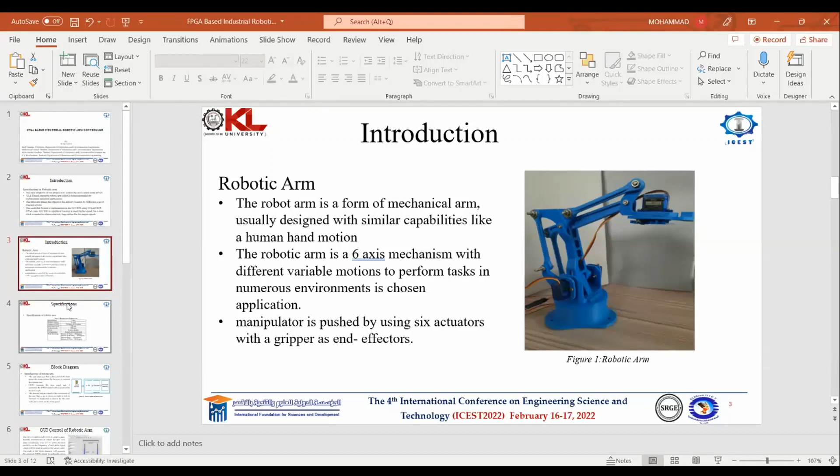As I said, the robotic arm has 6 axes. At every joint we have provided flexibility up to 180 degrees, so that in industrial places, if we change the workspace, it can be adjusted to that environment.

The cRIO processes the data received from the user and generates the PWM signal according to the angle selected by the user. The PWM signal is given to the servo motor, and after the servo motor receives the PWM signal, the movement of the robotic arm starts, just as the user desires.

This is the GUI of our robotic arm. We have 4 indicators here: time period 1, 2, 3, 4, which are used to define the time period of the PWM signal. We used 20 milliseconds since the servo motor actuator takes a PWM frequency of 50 hertz, so we need a time period of 20 milliseconds to generate the PWM signal.

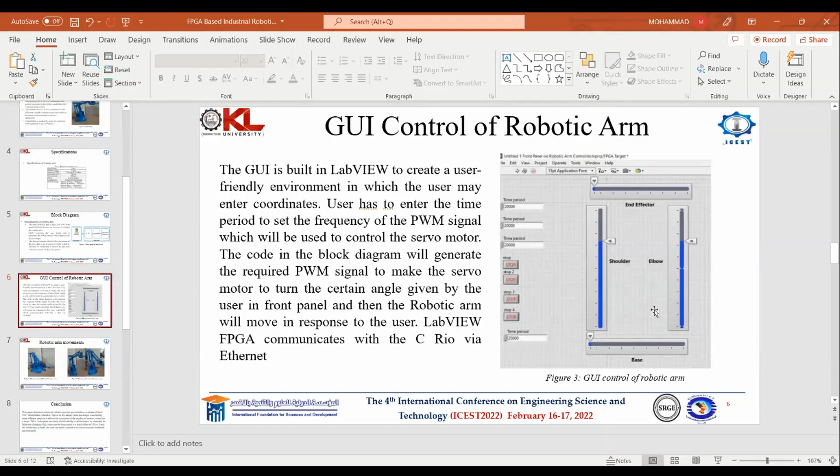There are 4 controllers we are providing. The bottom one is for the base, to control the whole body rotation, and two vertical sliders are for shoulder and elbow, to make x-axis and y-axis movement. The top one is the end effector controller, used when the robotic arm reaches the object, to either hold or release it.

These are some movements of our robotic arm. Figure 4 shows the movement of the end effector, closing and opening it. Figure 5 shows the movement of the shoulder, which is the y-axis, making the object move up and down.

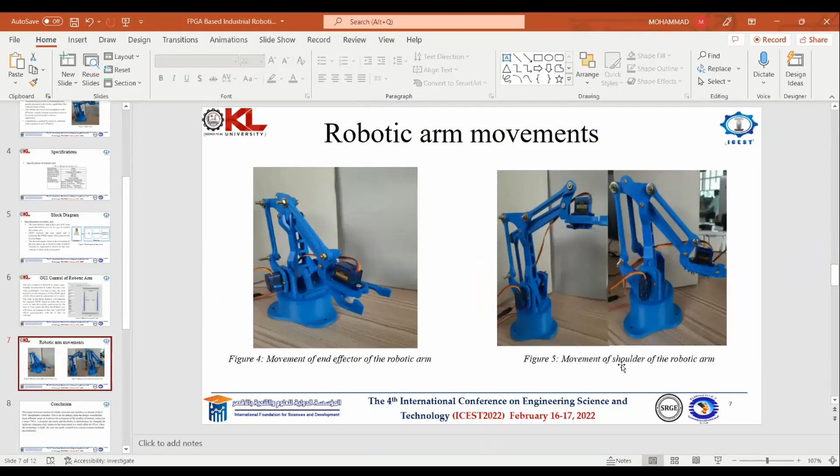In conclusion, we have discussed a 6 degree of freedom robotic arm controller, designed using the FPGA LabVIEW environment, which is more efficient than other controllers.

As a result, we have successfully designed a 6-axis industrial pick and place robot to perform various operations in industry, and at the same time provided a graphical user interface for full flexible control to the user.

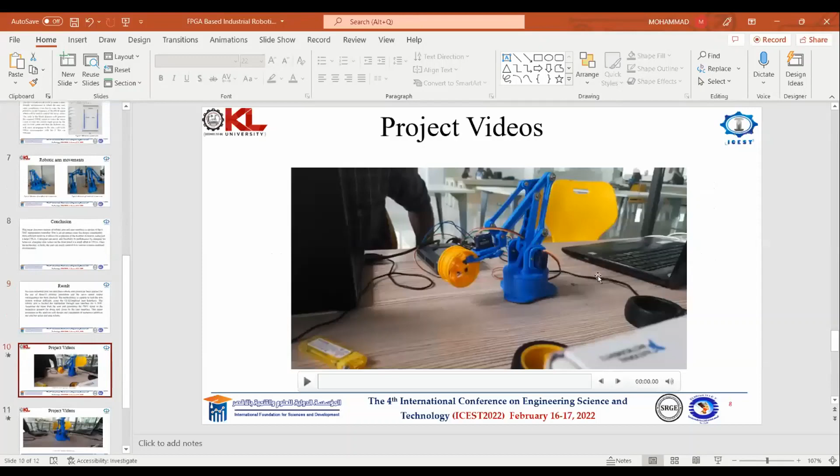This is our project video where the robotic arm performs pick and place of an object.

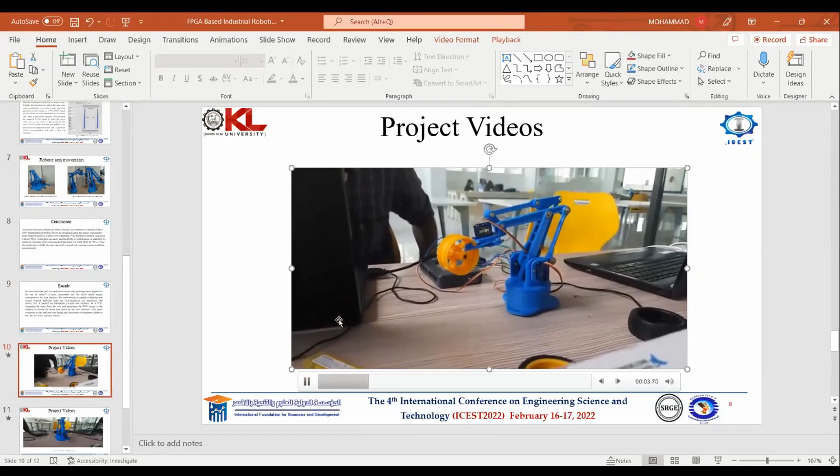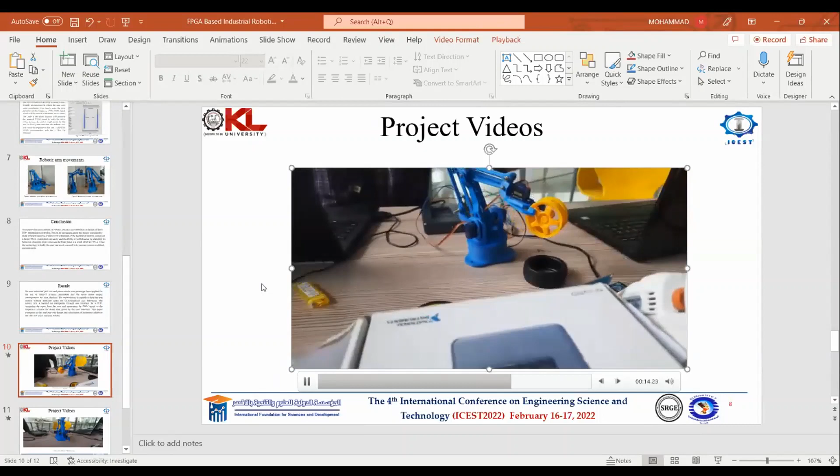As the robotic arm is controlled by the user interface, it releases the object at the goal.

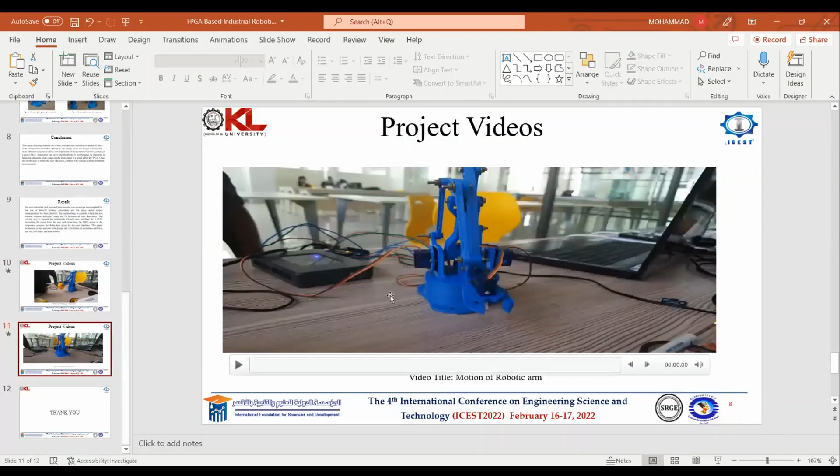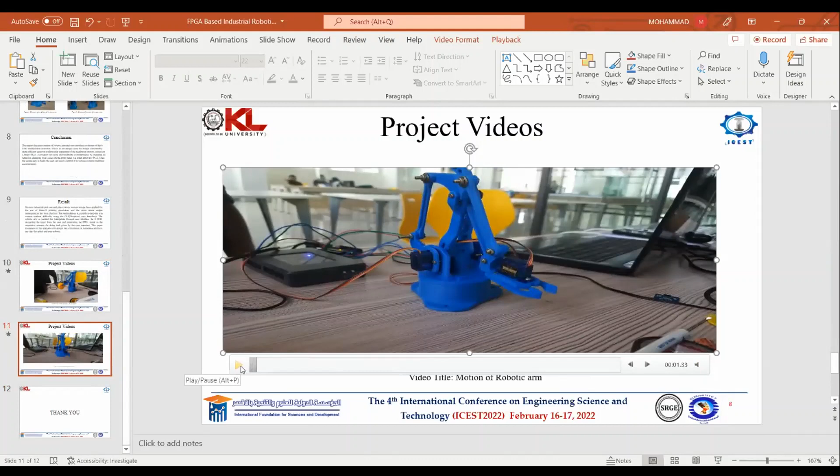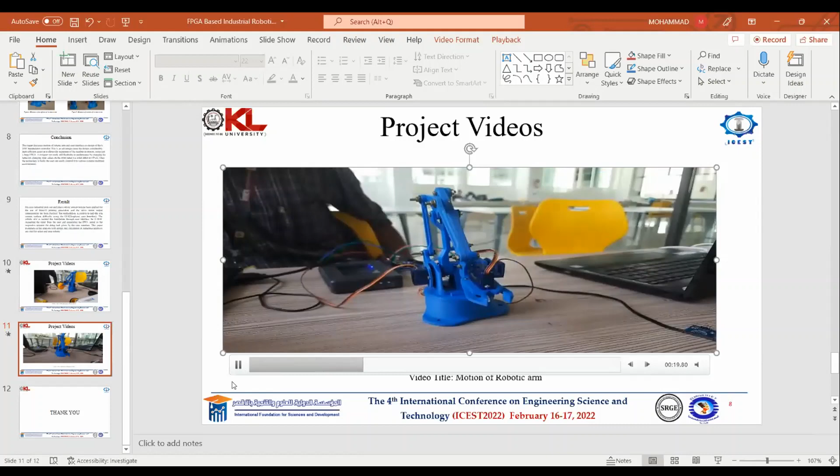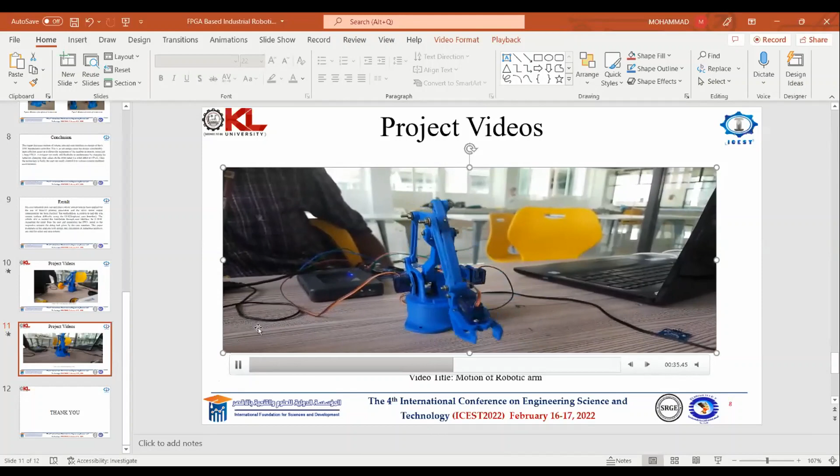This is the whole system, as I have told, we have designed a 6-axis robot. This shows all the movements the robotic arm can perform: this is the movement of the base from 0 to 180 degrees, this is the elbow movement from the y-axis, this is the x-axis movement, and this is the movement of the end effector.

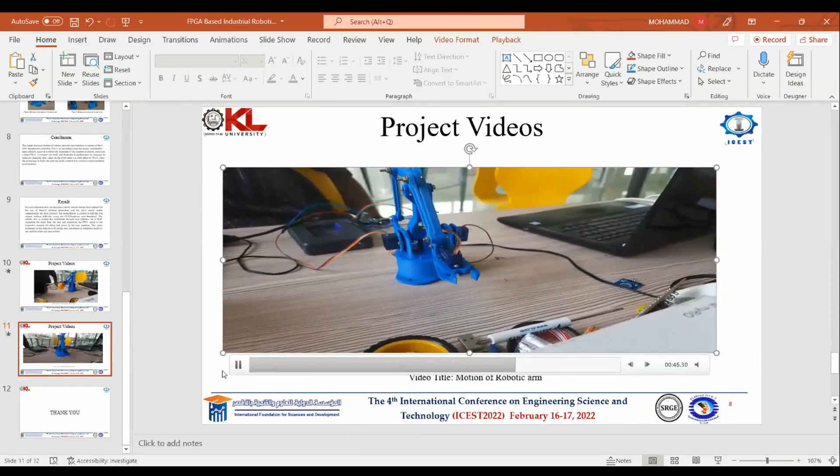Thank you for allowing me to present this paper.

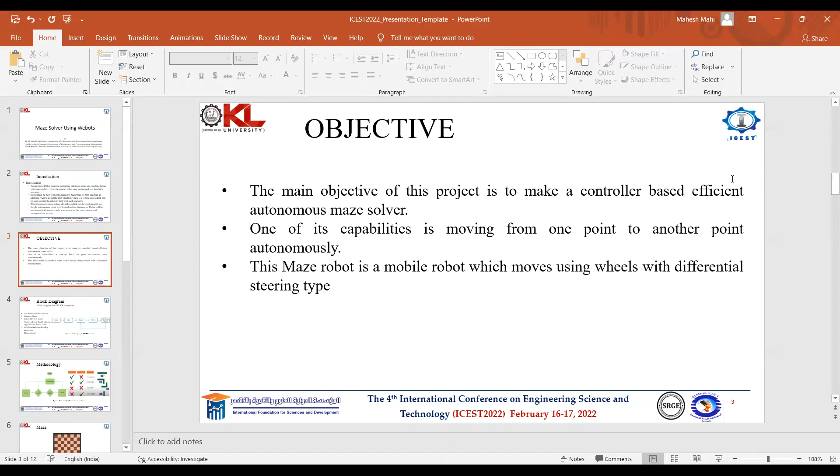The main objective of the project is to make the control-based system efficiently autonomous. Here, autonomous maze solver means the robot should follow the instructions automatically by itself without any human effect. The robot should solve from starting to end point autonomously, without any manual controlling. The robot should follow that.

As I already said, Webots is a software instrument used for robotics, where we can design how the robot will move, or pick and place. Webots is the software where we can create the maze, and the e-puck is one type of robotic software inside Webots, like a controller of the robot.

Here we are using Python language, and with the help of that we can code it. The wall following with the maze solver robot means mazes have different types, like wall following, line following, and so on. Here we are going with wall following, meaning the robot should follow the wall, and according to that the robot will move.

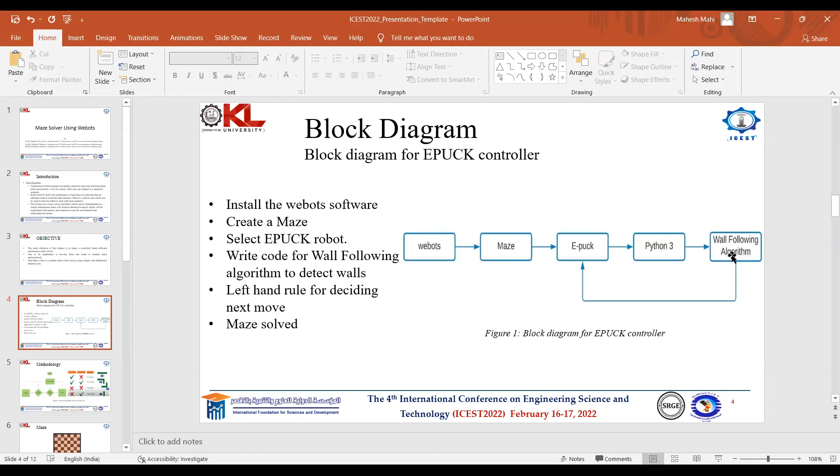Here are some conditions: the robot will start from the starting point and move forward. We are using the left-hand rule, meaning the robot will follow the left-hand side wall as it moves. If a dead end is there, it will turn right, left, or straight. If the point is a dead end, it will rotate 180 degrees and move straight onward according to the given conditions.

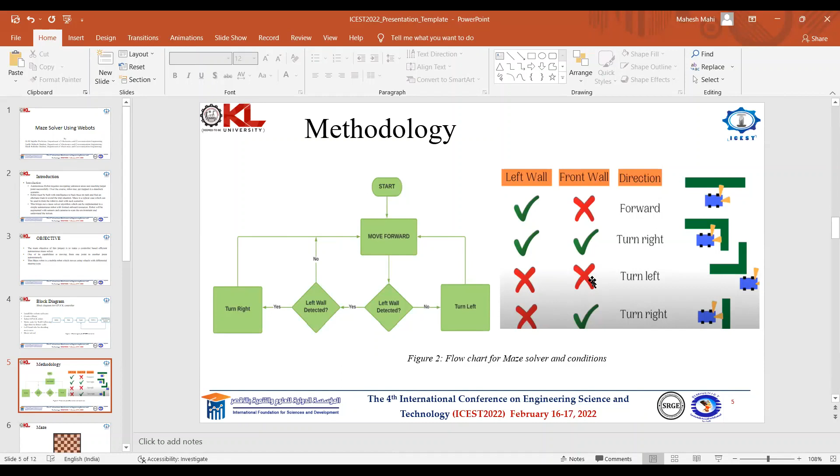As I said, here the maze is shown. This is the wall of the maze.

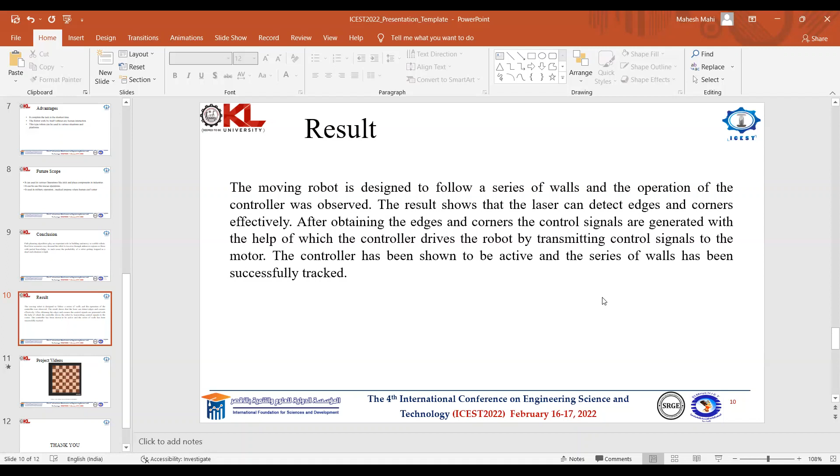With the help of active sensors, the robot has a lot of sensors like camera, IMU, and IR sensor. The robot will have different types of sensors available in the Webots software in the robotic system. I will show the project video here.

As shown here, the robot will move like a left-hand rule, following the wall. According to that, it can make decisions like turning right or left, and turn to the correct position. Like that, we can see the wall-following here. It will follow and turn back 180 degrees. It can follow the directions, like this.

Finally, the main task is to complete the task in less time, without any human effect, and we can use it anywhere in these kinds of situations.

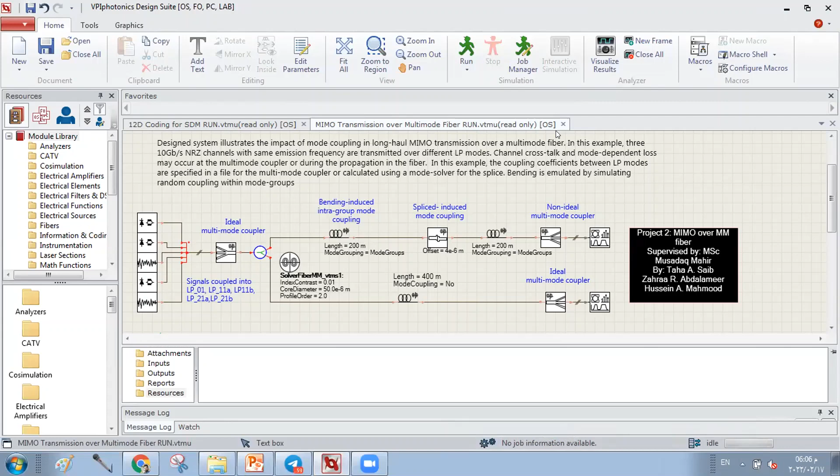I will show you the simulation frameworks and the run of all the simulations, regarding the MIMO transmission over multi-mode fiber. This proposed system shows three channels for OOK, which is on-off keying, a modulation format with low cost. Previously I showed you that we take advantage of three important parts: low cost, high performance, and less susceptibility to noise.

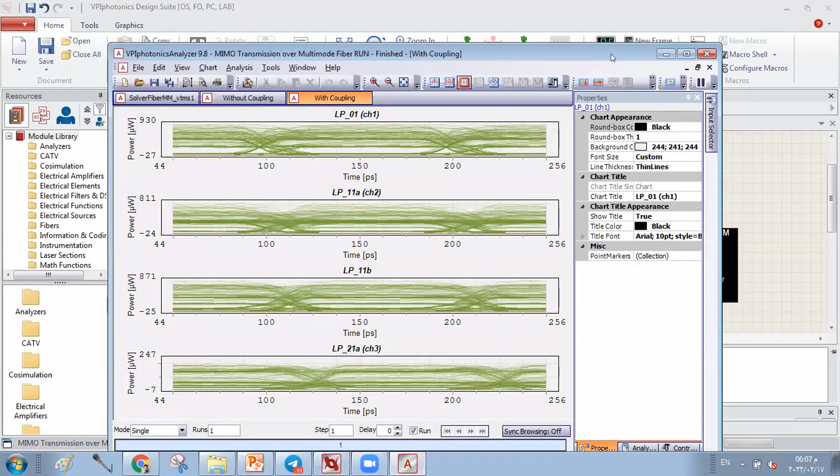In the MIMO transmission system, we used two parts. The first part, because we need more distance, uses mode coupling. The mode coupling is used in the first transmission system, and the second transmission system is used without any mode coupling. For the first, we find that the eye diagram for the LP modes tells us the results are okay, and we can show that without coupling.

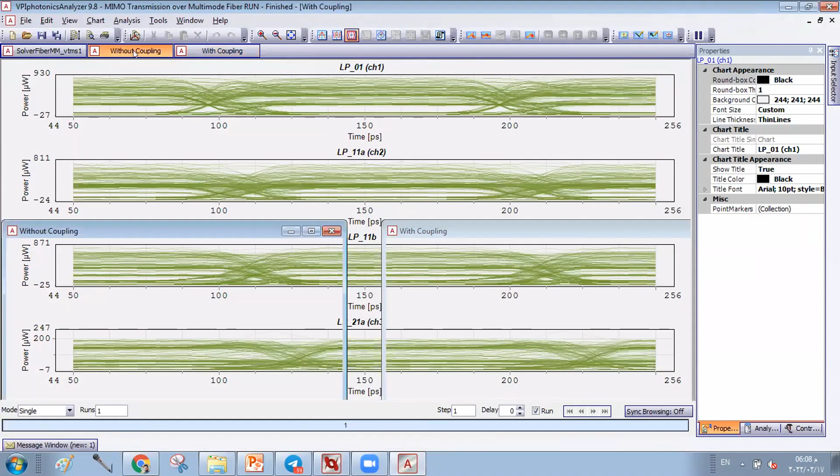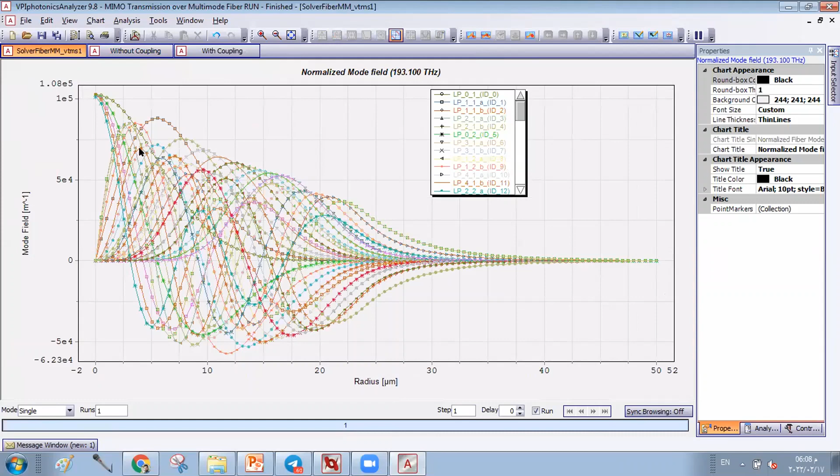Also, the eye diagram is very perfect without coupling, and when we use the mode coupling, we also get promising results. Now we can find the radius versus the mode field, which shows that the LP modes, the LP0 mode, the 1.1, even the 4.1, all these results show a promising result that a transmission system was successfully achieved.

And for the second transmission system, to achieve a whole transmission system performance, we used a 12-dimension space division multiplexing system. For optical fiber, this is a very high transmission system for bitrate.

The bitrate achieved from this system nearly exceeded 12 terabit per second. We used many techniques for making this happen.

We used a solver, a multi-mode fiber transmission system that depends on n-dimensional SDM. As shown in the results, we get 12 modes for this work, and we can get 12 modulation format constellations. This tells us that we can get many bit rates in different places.

We can use QPSK, QAM modulation format with 16, 64, even more levels for QAM, and this will let us get more transmission rates.

The transmission performance, as we can see, the system will achieve electrical spectrum over a few mode fiber, which is a kind of multi-mode fiber using multiple modes, and mode coupling is achieved.

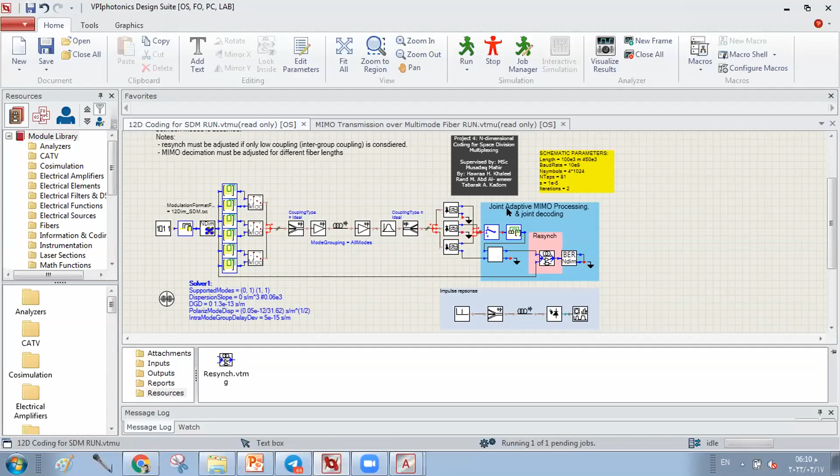Mode coupling means that all modes share the same carrier, and there are many optical impairments, so we solve it by using a MIMO system in the receiver. A joint adaptive MIMO processing and joint decoding is used to get better performance for the results.

This is a link response, which presents the electrical signal, and now the program is processing. We will get the final results for our program very soon.

This will explain the constellation diagram for the 12-dimension space division multiplexing system.

It takes several minutes because our system is fairly complicated, since we used many techniques, so the running takes near 5 minutes. Now the results will be shown on the screen.

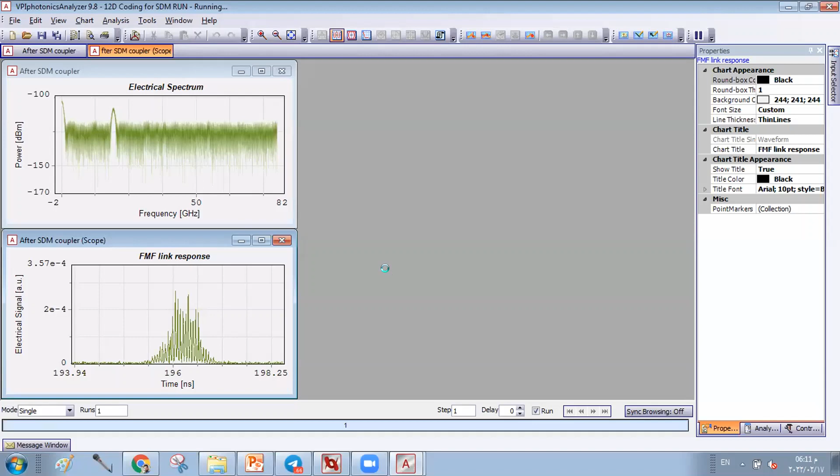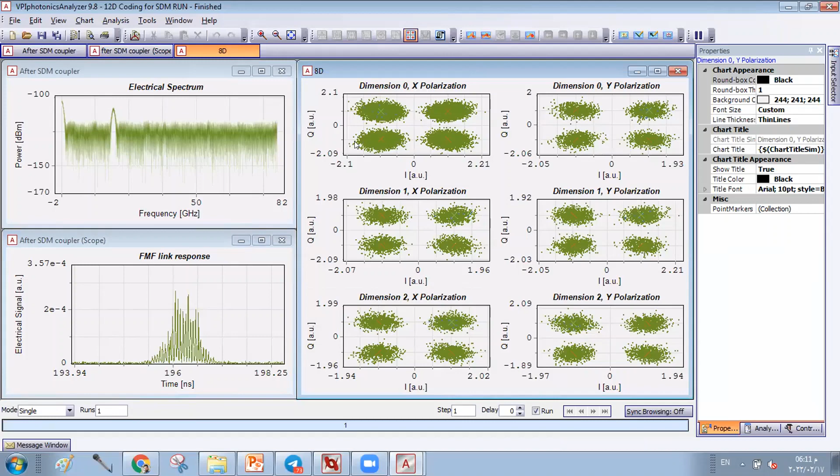As you can see, there are many results showing multiple dimensions and polarizations. Taking advantage of all of them gives a very reliable and very promising system for the optical network.

We can see that all the IQ shows a successful transmission for all the data.

There are many other systems designed under our supervision. Due to the time of the conference, I will explain them later, God willing.

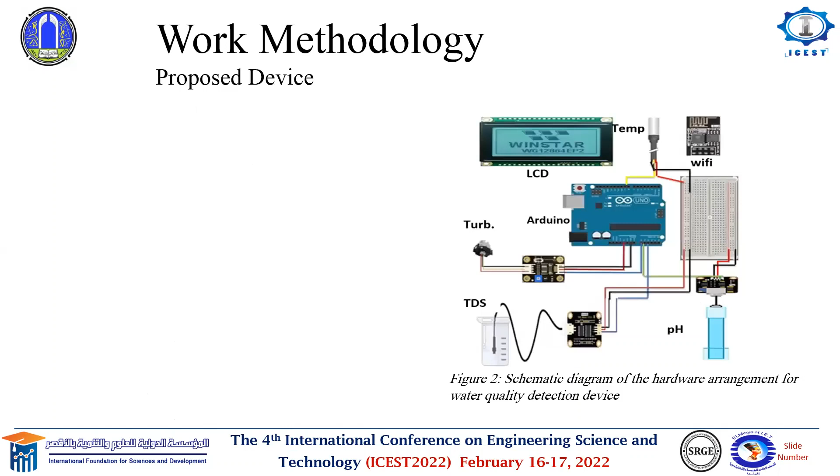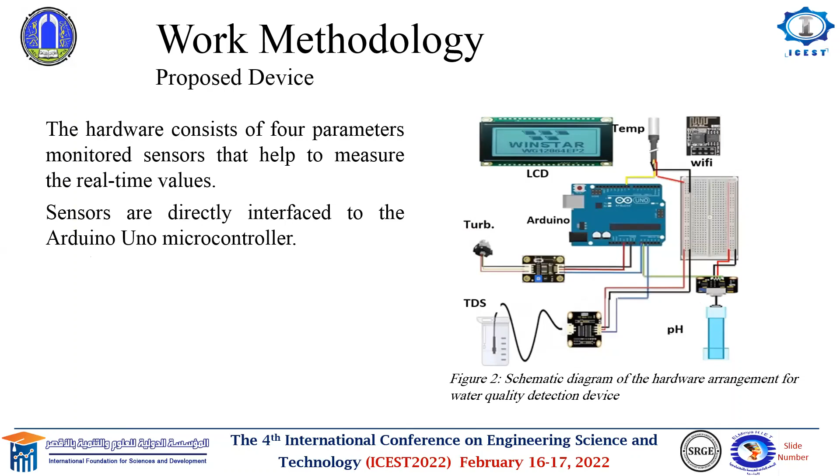On the proposed device, the hardware consists of 4-parameter monitoring sensors that help measure real-time values, where the sensors are directly interfaced to the Arduino Uno microcontroller. The sensor parameters are measured by immersing each sensor into different water sample sources to identify and classify water for drinking use.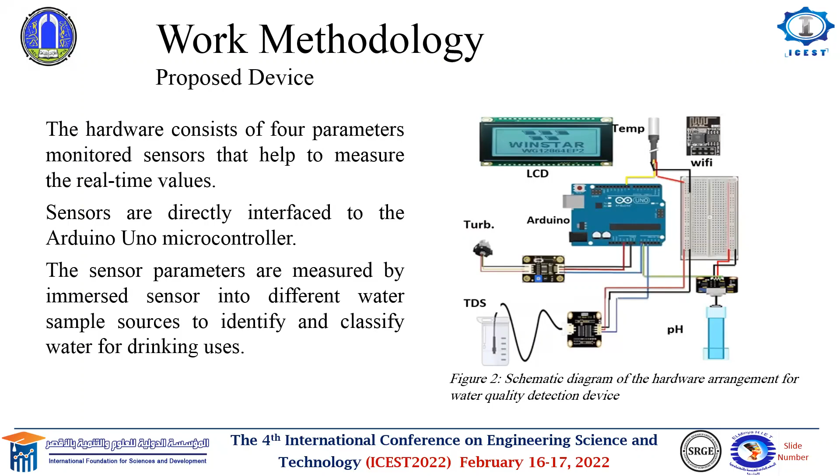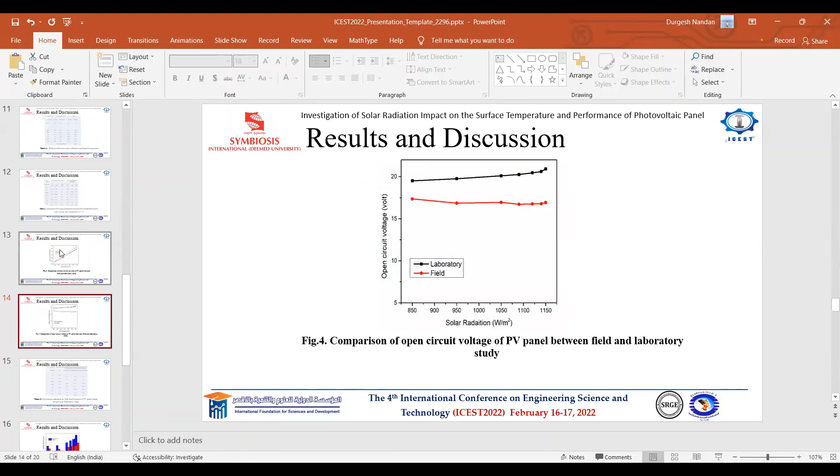This shows the comparison of open circuit voltage of PV panel between field and laboratory study. The red one shows the field, and this one shows the laboratory experiment.

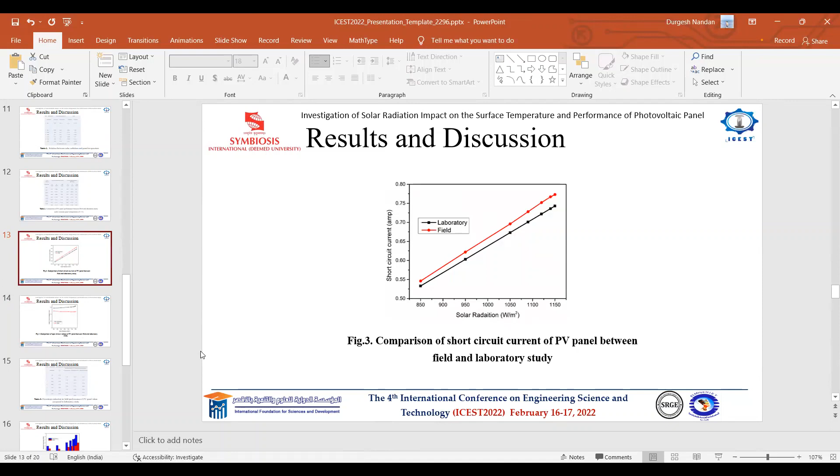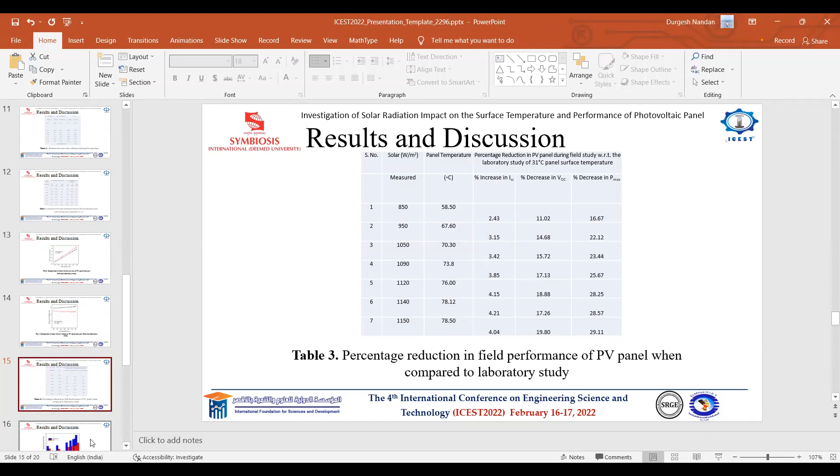At the end we conclude that this study confirmed the fact that increased solar radiation increased panel temperature, and due to this a significant reduction in panel performance was reported when compared with constant surface temperature condition of PV panel. It can be concluded that when the PV panel is exposed in an open environment, its surface experiences an increase in level of solar radiation that enhances the surface temperature of PV panel.

Therefore, the efficiency of a solar PV panel reduces, making its operation ineffective. Thus, a proper and frequent cooling system is suggested for efficient utilization of solar panel.

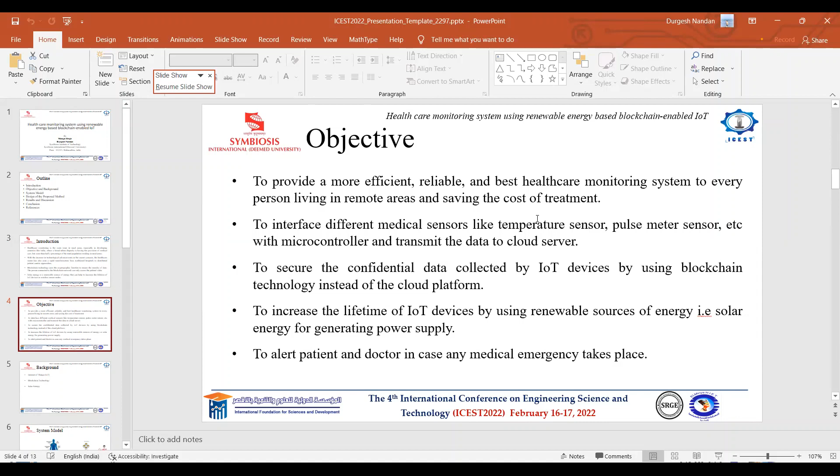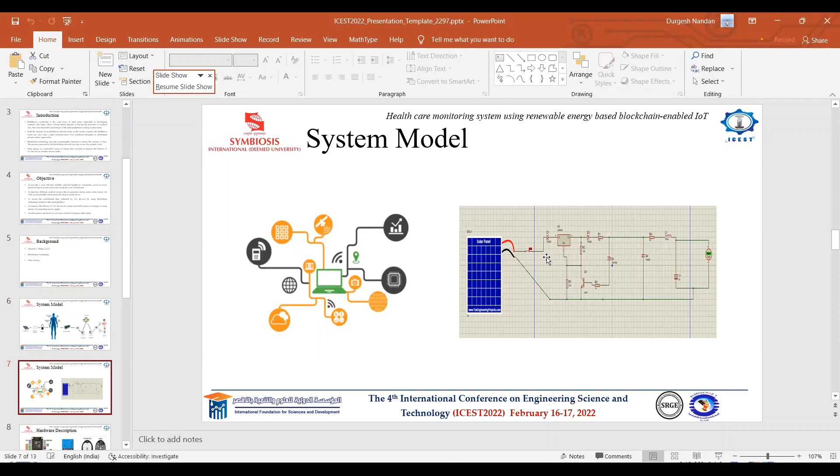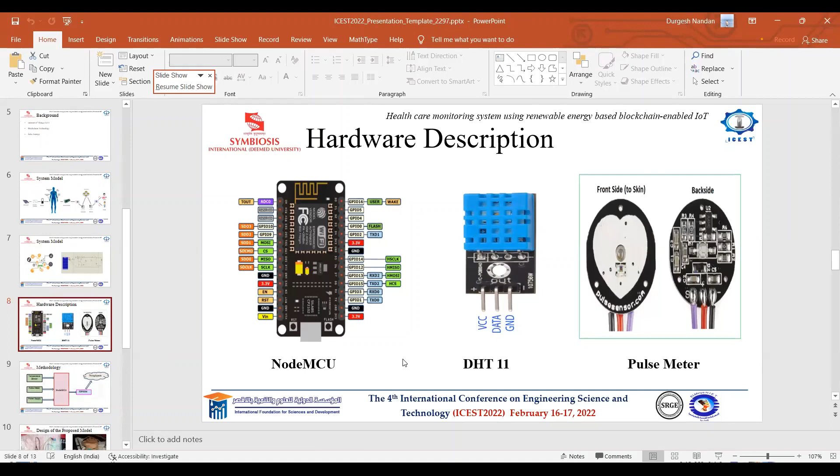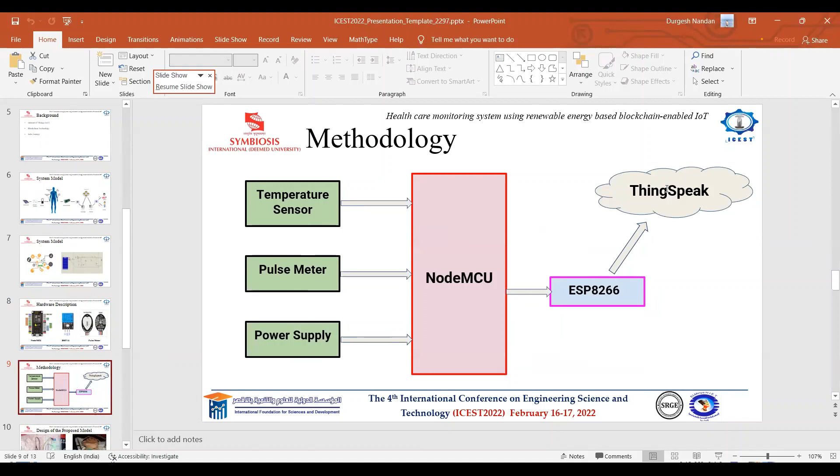Basically we use pulse meters, DHT11, and Node MCU as the hardware descriptions of our architecture. The methodology is that there is a Node MCU microcontroller unit connected to temperature sensor, pulse meter sensor, and power supply, and via cloud it is transmitted.

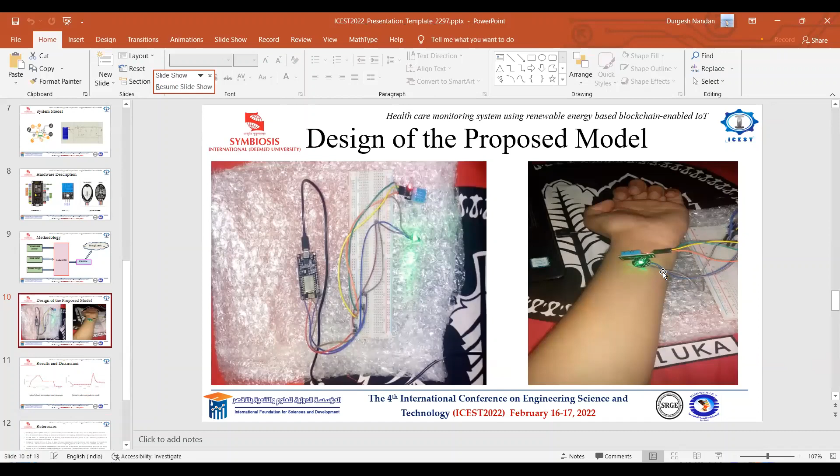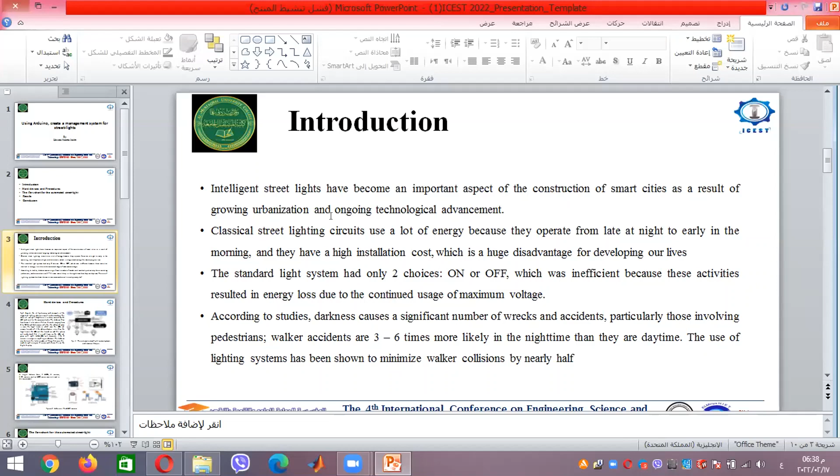Hardware device and procedure, for ease of understanding this experiment. It consists of the LED in off time, turned off, and...

It is a project represented by: if there are objects in front of the IR sensor, it shines light on the object and receives the infrared light back, giving this signal to the...

Arduino. And there is also an LDR sensor. As photoresistance increases, this resistance value changes - 0 is maximum darkness, and 1023 represents maximum light. We have the flow chart for the automated street light.

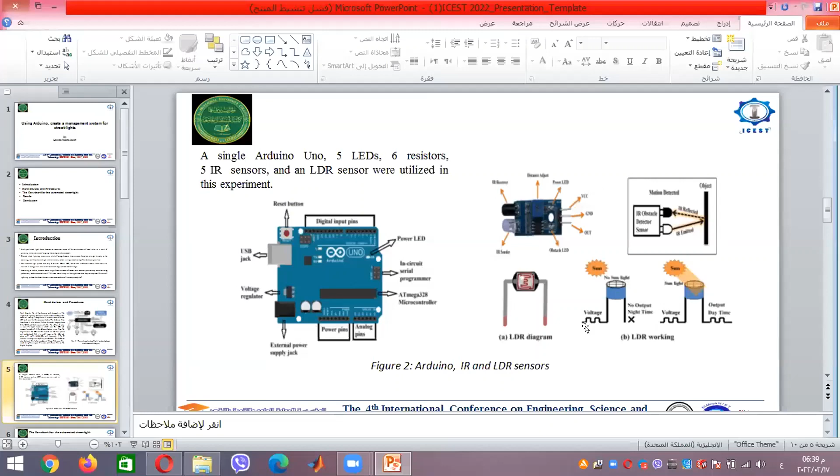We know when there is daytime or nighttime, this gives the data transfer to the Arduino, which represents the microcontroller, and this microcontroller converts this signal to a discrete value from 0 to 1023.

This value is then used for the decision: if this value is under the threshold value, it represents nighttime, and at nighttime it will also choose depending on the IR sensor.

If the IR sensor detects this, the light can be set to a high voltage, and another decision is made for the dimming condition.

Also, if this value is greater than the threshold value, it represents daytime, and the street light goes to the off state.

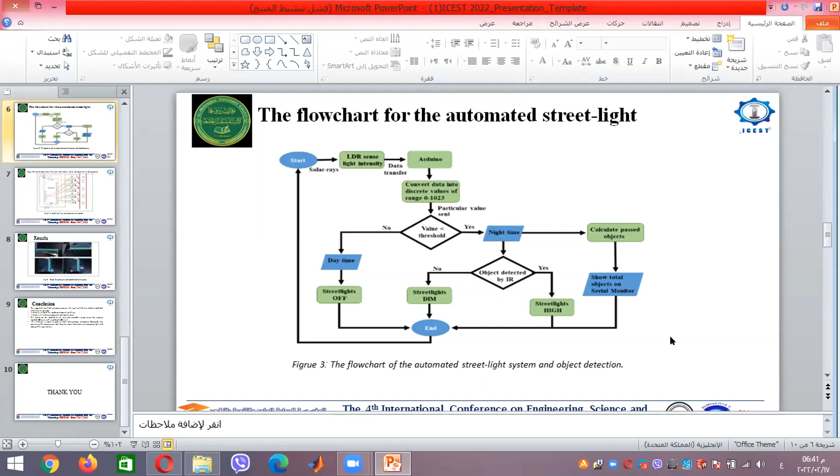Serially, the number of objects that pass through this street. In this figure, we show the structure of the connection of all the components in the experiment.

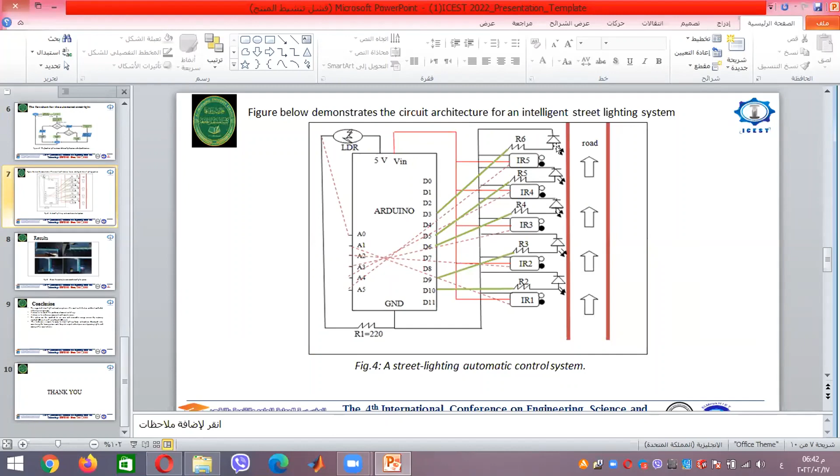In conclusion, the suggested street light automation system is the most cost-effective method of reducing energy usage. It allows avoiding manual switching by replacing standard LED units with solar LED units. This technique is simple.